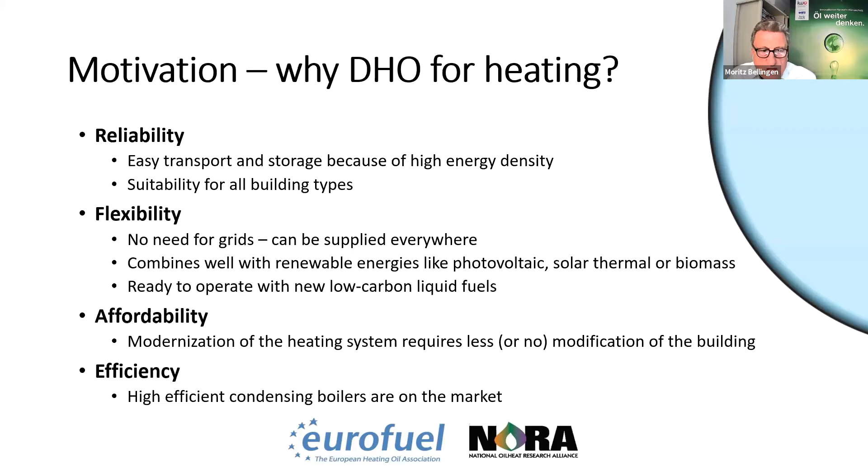Now the question, why renewable components for DHO fuels? I think after today's discussion, this is nearly answered, but I would like to sum up the most important points. First, the EU requirements or the governmental requirements. You already heard, we have to reduce to minus 95% or better to 0 CO2 emission in 2050.

Another point is we want a level playing field to natural gas. Natural gas has a reduced CO2 footprint. And if we mix up heating oil with renewable components, we can be equal in emission to natural gas. And this may give a basis for subsidies and avoid heating oil bans in future.

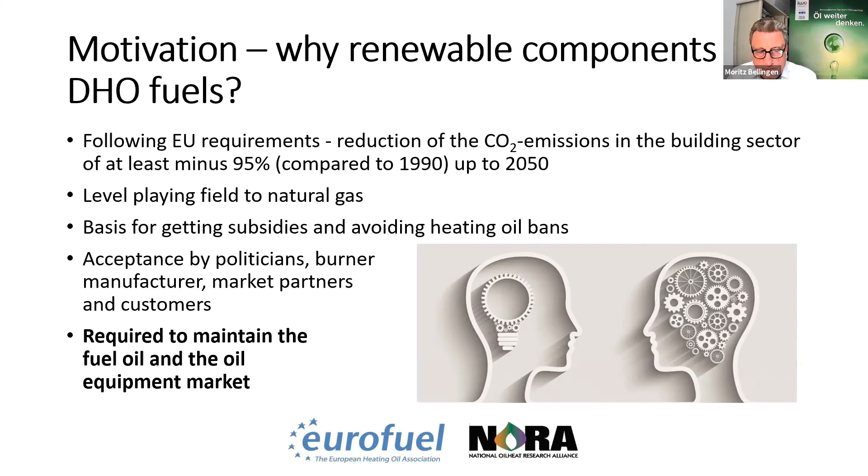This will lead to acceptance by politicians, by burner manufacturers, by market partners and customers. So we conclude that renewable components are required to maintain the fuel oil as well as the equipment market in future.

This is our vision. This is a Eurofuel vision. We have a three-step approach. First step is efficiency: replace your old boiler with a new condensing system, do some insulation work, and you will decrease your demand drastically. Second step is hybrid, incorporation of renewables like solar thermal, photovoltaic, or wood or pellets. And the third step, if the amount of heating oil is reduced drastically, a low carbon liquid fuel to reduce it close to 0.

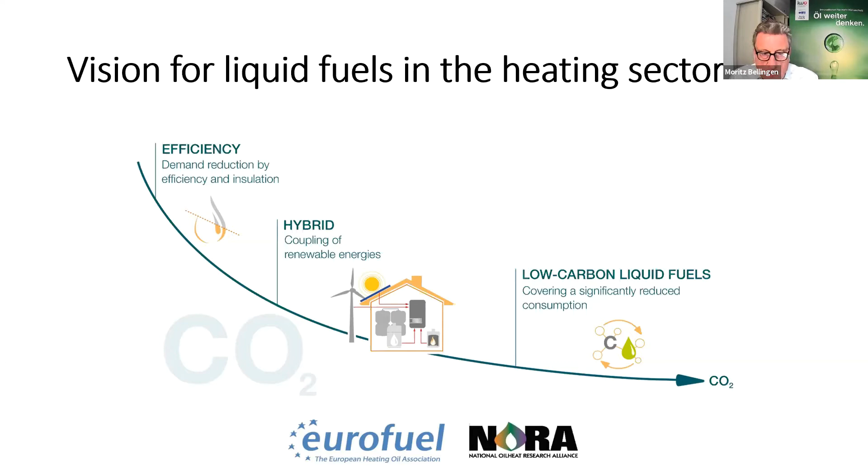For a mathematical model, you always need boundary conditions to make this model, and I would like to sum up these ideas. First is that we meet the targets in 2050. Second is that the heat demand, the heating oil demand, will be reduced, as already mentioned, like the previous years, via efficiency, insulation, via hybrid systems, and this also takes into account migration to other energy sources.

Another basic idea is that in 2050, we only operate heating systems which will be installed from '24 on, which means new systems, condensing systems, high efficient systems. And the fourth idea is that today we only have a limited extent of renewable components, so we have to do it stepwise and increase it in the coming years.

For the model, we created a new fuel, and you should have in mind it's only an example model, a calculation idea. We have a DHO select fuel, which has 33% of renewable product, and this is delivered to all new installed appliances from '24 on. So a new oil device, oil boiler, has the same CO2 emission or even slightly better than a gas-driven one. And from '37 on, this will increase up to 100% by 2050.

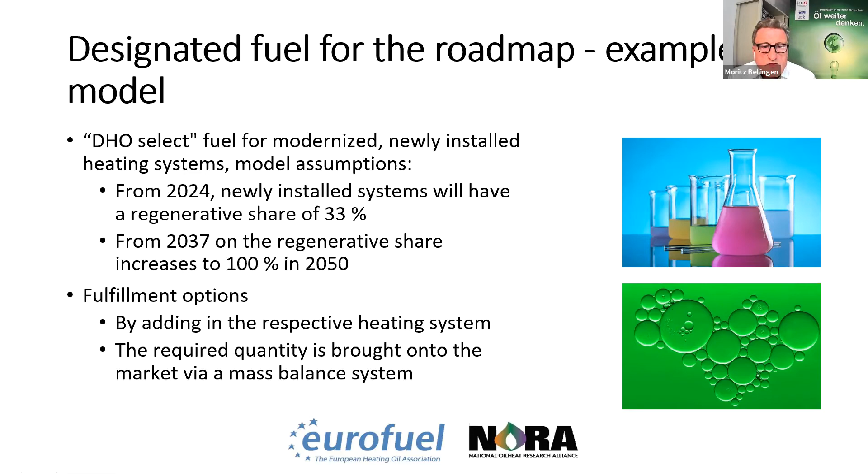So this is the first graph, the idea of our calculation. On the top line with the blue triangles, you see the total amount of boilers. From today on, we have around 20 million in Europe. We assume that this will decrease in 2050 to around 10 million.

The purple line underneath is the number of oil heating appliances sold each year. On the left hand, it is real data from the past, and from 2020 on, we expect to be stable. And then you can see some kind of hockey stick curve, an increase up to 370,000 appliances a year.

And you may now ask why, and we have some reasons for this increase. First reason is heating systems, oil heating systems becoming older and older, and more have to be replaced. So we have more and more decisions in the near future.

We have a high amount of systems in rural areas where no gas grids are available, so they don't have the chance to switch over to gas. They have to have another solution. And as you know, maybe heat pumps are not suitable for old and less insulated buildings, so these people also may decide for oil.

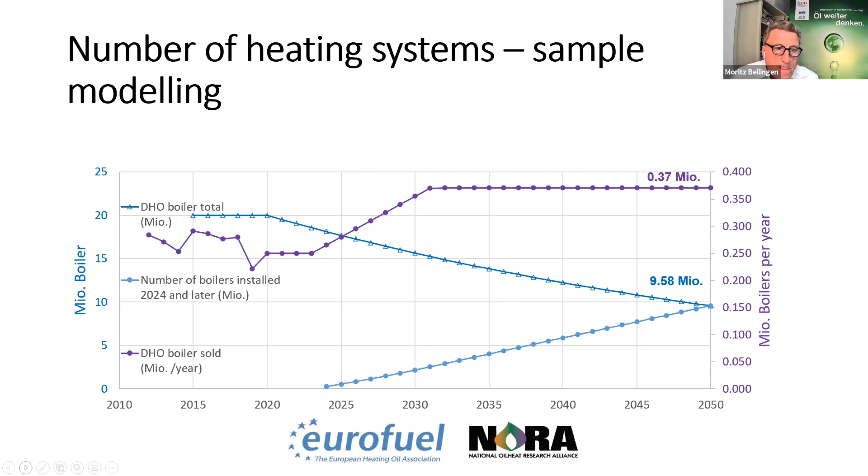Next slide, please. This is the share of renewables. As already mentioned, we start the new product, the select product, with 33%, and from 2037 on, it will be increased to about 100% to ensure zero emission in 2050.

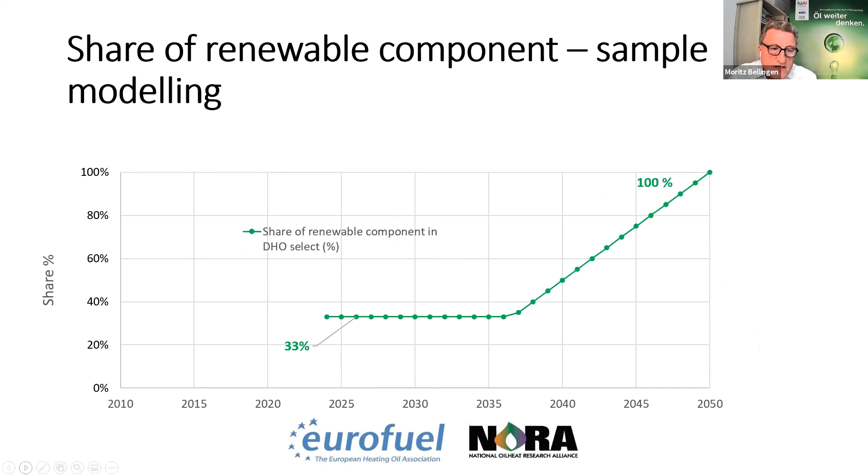So this is the CO2 emission calculated, and as expected, in 2050 it's zero. So a drastic decrease in the coming years. And with this line, we are on track, and we should be accepted by politicians and officials.

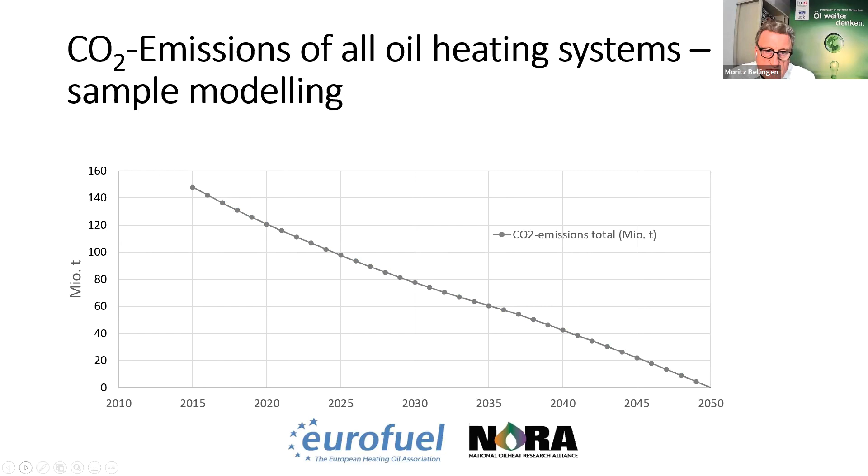Next slide, please. So this is my summary. Our model is called 10-10-0: 10 million heating systems in 2050, 10 million tons of domestic heating oil sold in 2050, and zero CO2 emissions.

So this is the idea for the future. And you may have in mind, this future is 30 years ahead. It's a long time. Several things may happen, but if you don't have an idea, I think you can't make a proper comment on your product.